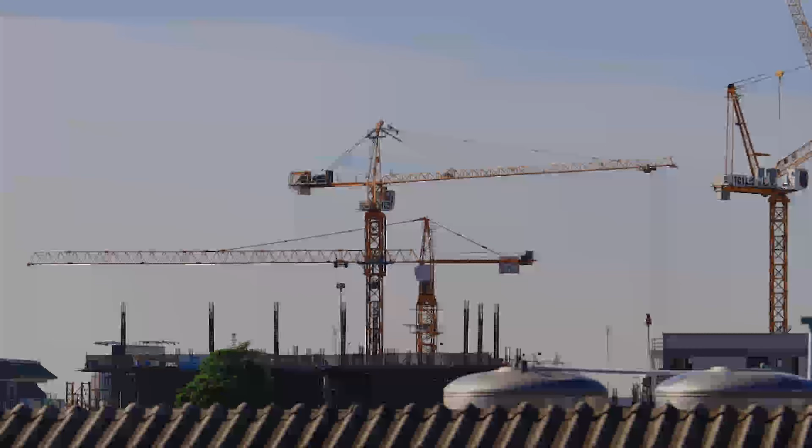I'll start with the incidences, since these are happening a lot. When fire erupts, there can be many reasons, short circuiting or whatever, but another reason is the way urban infrastructure is coming up these days. We have so much population to cater to, and cities are developing without any master plan. It's haphazard, congested. Things are just coming up with no attention paid to fire security or anything.

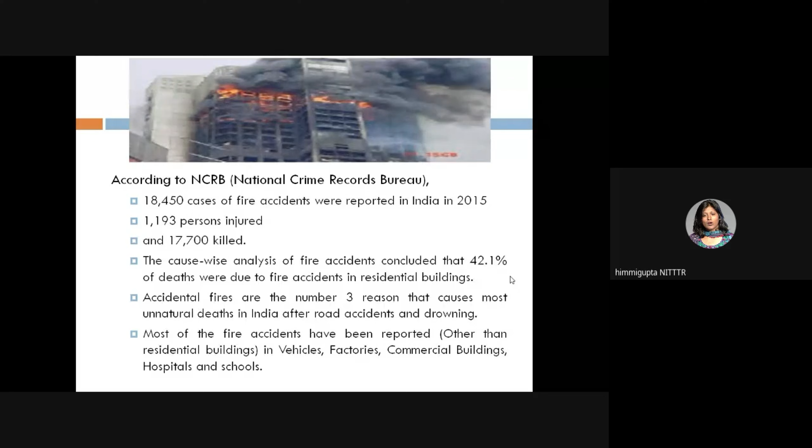Even more alarming, accidental fires are the number three reason that causes most unnatural deaths in India, after road accidents and drowning. Most of the reported cases, other than residential buildings which are 42%, are in vehicles, factories, commercial buildings, hospitals, and schools. So buildings and structures are a big part of where these fire incidences are happening.

It combined almost the area of six Indian states: Delhi NCR, Goa, Sikkim, Tripura, Nagaland, and Mizoram - about 63,000 square kilometers. All this is happening due to climate change, and what has happened to the environment is not going to change very soon. So this danger is upon us around the clock, apart from earthquakes and other disasters. This is another disaster always lurking on our heads, and when a wildfire happens, even infrastructure gets affected.

The occurrences of these fires have become more frequent, more unexpected, and their effects have become more intense, so the risks have become more intense. What risk is happening with fire has to be taken very seriously. This is called fire risk, a proper technical term, and it has been ranked fifth - from last year's ranking in 2017, it has recently gone up by three positions to fifth.

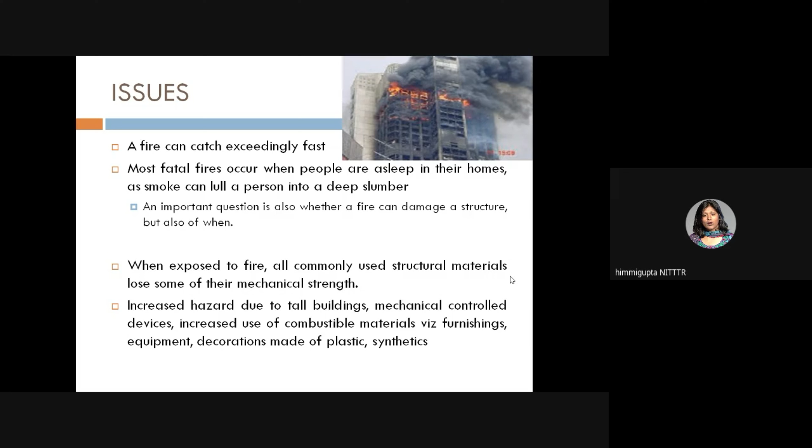There are more mechanically controlled devices around buildings now, and increased use of combustible materials like furnishings, equipment, and decorations made of plastic and synthetics. These are all fuel for the fire, so the hazard has increased with taller buildings and more mechanical devices inside that can catch fire.

So the idea is how we can use engineering principles to achieve the requirements of fire safety of structures. We have to optimize the fire protection to the structures, and also address the complex issue of how the whole structural behavior will happen when a fire comes up.

Fire resistance of a building structure is basically the ability of the structure, when exposed to fire, to maintain its strength for an appropriate time while everything around it burns. That is the basic definition of fire resistance.

It is also the property that prevents or retards the passage of excessive heat, gases, or flames under conditions of use. So this is another way of looking at fire resistance: what will prevent or retard the passage of the fire.

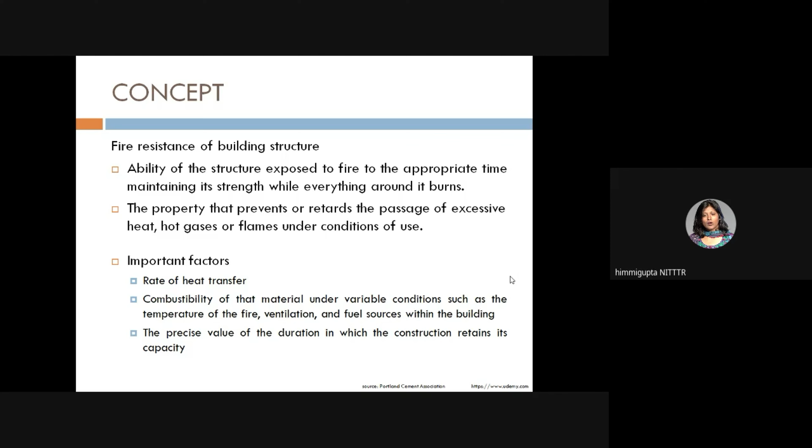Fire resistance means materials and design features incorporated in the building that will get ember exposure, fire exposure, but will resist it. We're not saying the structure will not face the fire—these embers are particles generated due to fire, so the structure will get exposed to it but will resist it. We try to use such materials, or have such design features, and that's what we're going to discuss.

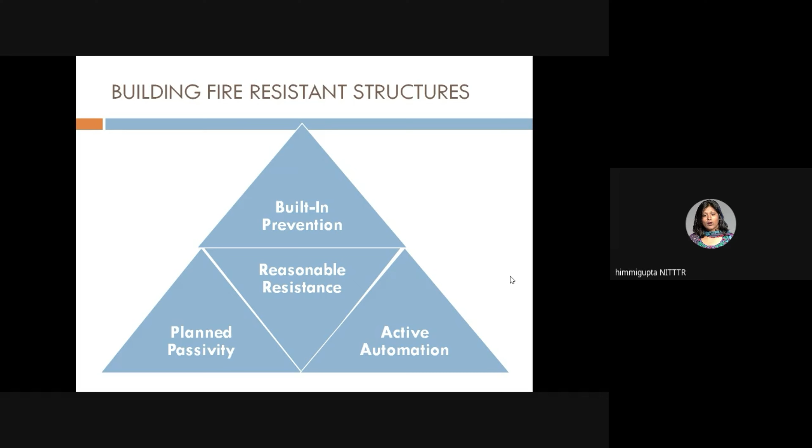To build a fire resistant structure, I need some built-in prevention that will help, some active automation like sprays, and a planned passivity for how to tackle it in a passive way. All three parameters together can give reasonable resistance.

Structurally, one aspect is resistance to collapse, which is the load bearing capacity applying to load bearing elements. Then there's integrity, which is resistance to fire penetration. And the third aspect is insulation, the resistance to transfer of excessive heat. These are the three measures by which fire resistance can be designed: resistance to collapse, integrity, and insulation—all for a specific period during which the structure should be able to resist it.

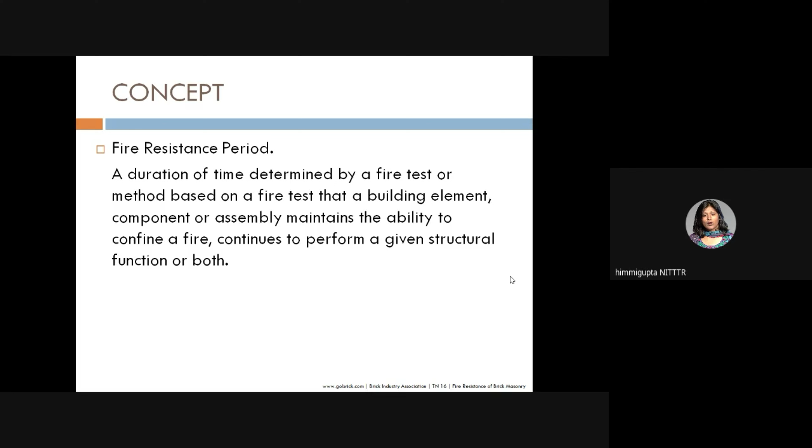This duration of time is determined by a fire test, and a method based on that, a building element, component, or assembly maintains the ability to confine a fire and continues to perform a given structural function, or both tasks. So that is defined as the period. There is a proper test conducted by which we know the thing was able to confine the fire and still perform structurally well.

When doing a fire analysis, the calculation will account for the actual technical state of construction, the material exposed to the thermal impact of fire load. What is the type of construction that happened? What is its state? Then you will be provided with a critical temperature, the temperature to which the structure maintains its capacity, or advised of the optimal fire protection of the structural elements. So the idea is to take into account the construction material, the stage, and then suggest the period and time within which the structure will maintain its integrity, insulation, and capacity.

Building regulations require that certain elements of a structure have fire resistance. So it is required that some elements be fire resistant. Now how are these determined? That will depend on the building size, the building use it is being put to, and the function of the element.

For the design of structures when designing for fire resistance, I have three steps. First, I determine what is the design fire, the fire it may be exposed to - just like when designing for dead load, there are some design dead loads. This design fire is in terms of a temperature-time relationship - with time, how much the temperature will rise. Then I calculate the structural temperatures, what temperature the material will reach. And then I assess the load carrying capacity at this elevated temperature. That is very important.

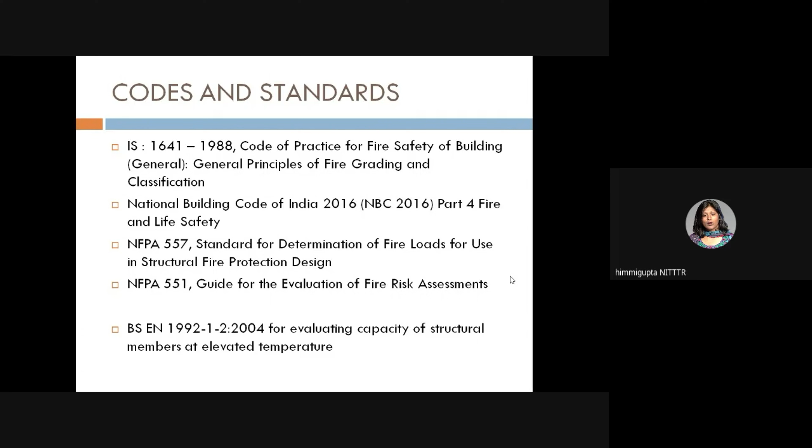Talking of codes and standards, in India the first most important standard in this relation would be IS 1641, which is for fire safety of buildings, general principles. Then our NBC Part 4 also takes due consideration of this. Then we have NFPA 557, for determination of fire loads, and 551 for evaluation of fire risk assessments. Then even British codes are there for evaluating capacity of structural members at elevated temperatures, and many times these British standards, BS codes, are quite similar to our IS standards, so they are also often referred to.

Then we have IS 2190, for fire extinguishers, and also 15683. It's very important to know which codes are applicable.

Now talking of the fire load - fire load is basically the amount of heat in kilocalories which is liberated per square meter of floor area of any compartment by the combustion of the contents of that building and any combustible part of the building itself. Because what is inside the building will burn, and the combustible part of the building itself will also burn. So all this together, how much heat in kilocalories is liberated per square meter of floor area, that is defined as the fire load density.

It is calculated by a formula depending on the floor area, total mass of combustible material in kilograms, and the calorific value of that. Of course, when using this formula, we assume the materials are uniformly distributed throughout the building, and that all the combustible material will undergo combustion. So that's the assumption we are making.

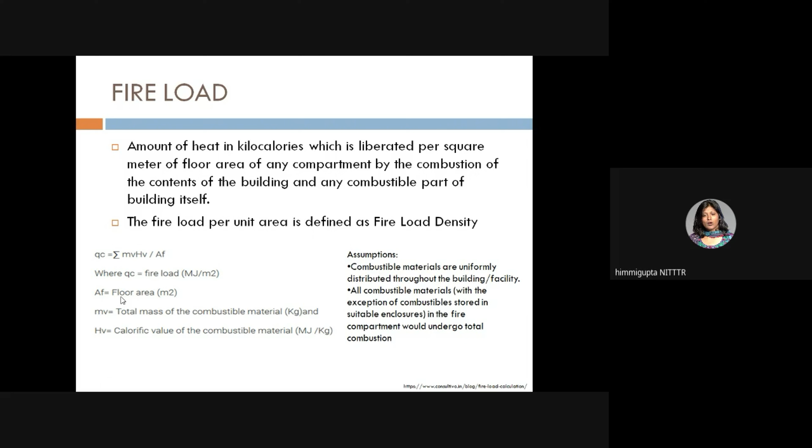Now, in terms of fire load, we also talk of movable contents - the combustible furniture, equipment, goods, supplies - all these which are movable.

Then there are interior finishes like exposed combustible materials permanently fixed to walls, ceilings, floors, plus doors, trim, built-in fixtures. These are interior finish. So these two things are basically contributing towards the fire.

And the fire load sometimes is also called the fuel load. Basically what we do is all weights are converted to equivalent weights of combustible having a calorific value of 4700 kilocalorie per kg. This value is adopted as a general assumption, a safe number, so that whatever weight is there, you assume everything together has this value if you don't have individual data. As an average, this number is adopted very popularly.

The fire load is important because we use this value as a basis to have an occupancy grading. Based on fire safety, grading is given to various buildings, so how much occupancy it can take depends on this.

Now we have to understand that if compartments are larger, they will generate higher temperatures. There will be more radiation from it, and they will have higher burning rates. So this becomes very important to understand. And of course the different thermal conductivities of enclosing walls become important.

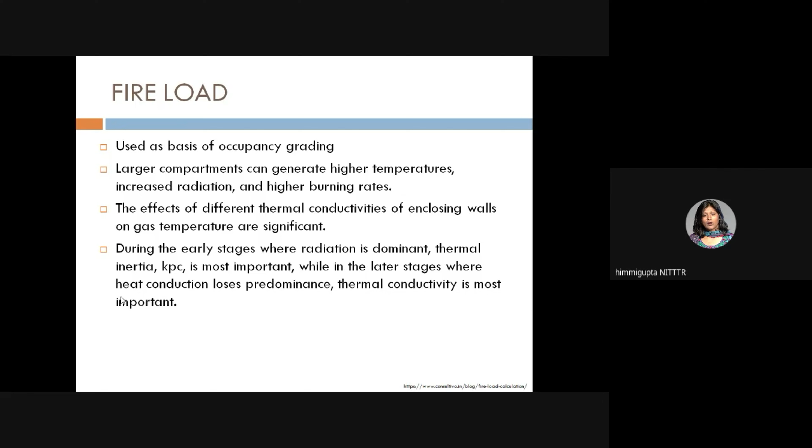Another factor to consider is the early or pre-flashover stages of fire growth, especially for high complex and hazardous entities. When talking of early fire growth, important parameters include the amount and surface area of combustible materials, how they are arranged, how the openings in walls, ceilings, or doors are placed, and what are the local zones of hot gases. These are very important to evaluate whether there will be early fire growth.

Another effect that comes in is the wind effect on high rise buildings. It incorporates into the design fire as an important criteria, because when wind is blowing in high rise buildings, it will definitely add to the smoke, which will also spread radially from the central axis of the plume.

Wherever this fire is generating from the central axis, the smoke will spread radially to higher positions. Then cool air will be entering towards the burning fuel at the lower levels of the building. This is how the fire will keep spreading, and it's necessary to understand this.

As per a study done a few years back at IIT Gandhinagar, the fire load in modern day buildings in India is three times greater than what it was even as late as the 1990s. The number of buildings have increased.

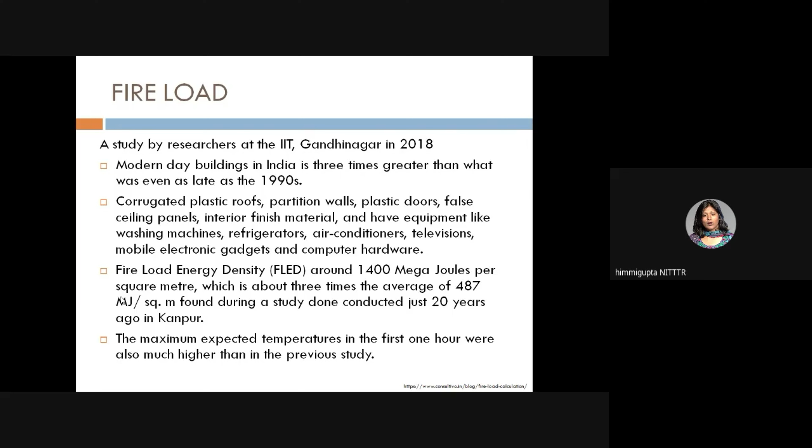It has also been found that the maximum expected temperatures have increased in the last 20 years. Things are only getting more and more risky - more buildings, more fire load, and even the expected temperature has increased.

NFPA standard 557 proposes that the fire load calculation should be done by either the weighing method or the inventory technique, or a combination of both methods.

In the weighing method, it is based on the weights of the combustible and the corresponding calorific value of the material. You convert them into units and get the megajoule unit - weight into calorific value.

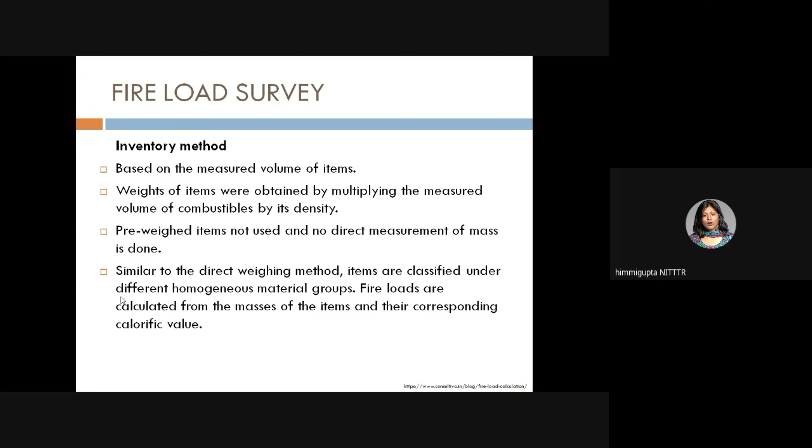Inventory method is based on the measured volume of items, so weight is obtained by volume into density. Pre-weighed items are not used and no direct measurement of mass is done. Similar to direct weighing, you then use the calorific value to get the corresponding heat values.

The combination method uses data from both the direct weighing method and inventory method - weights obtained by directly weighing or pre-weighed items, or by taking dimensions and volume and converting with density to volume, then finally applying the calorific value to get the heat generated.

As a designer, the inputs we need are: the layout, major compartments and unit blocks within the facility, the inventory of material, what kind of material contributes to fire load, any situational or seasonal impacts on the inventory, and site observations if any.

When doing the design of a member, this is how we go about it. We determine the reduced cross section corresponding to 500 degrees Celsius, obtain the material property at that temperature, calculate the rebar temperature using penetration due to fire, and then determine the reduced moment capacity.

Many studies have been done showing how, in case of fire, the various resistance capacities change. For example, if otherwise what was required was 342, for fire resistance you require at least 381.

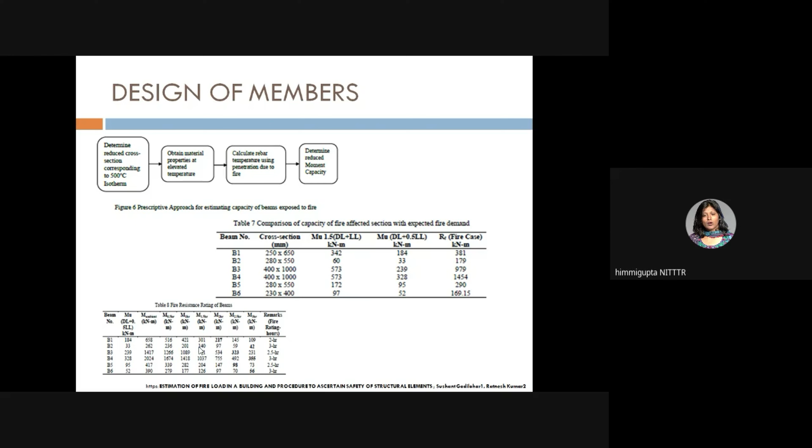When designing a structure exposed to fire, I do a structural design at normal temperatures and then in fire conditions. I should know the material properties in fire, then design the individual members exposed to fire, and then the entire structural assembly as well.

Talking of fire hazard, the classification is into three categories: light, ordinary, and extra, or low, moderate, or high. There may be class A combustibles in minor quantity and class B flammable liquids less than 4 liters in quantity. These include solid combustibles like paper, wood, cloth, and plastics, and flammable liquids like alcohol, ether, oil, gasoline, and grease, which can be extinguished by smothering.

So these are the two classes of things, and based on the quantity in which they are present, the classification is done for the hazard.

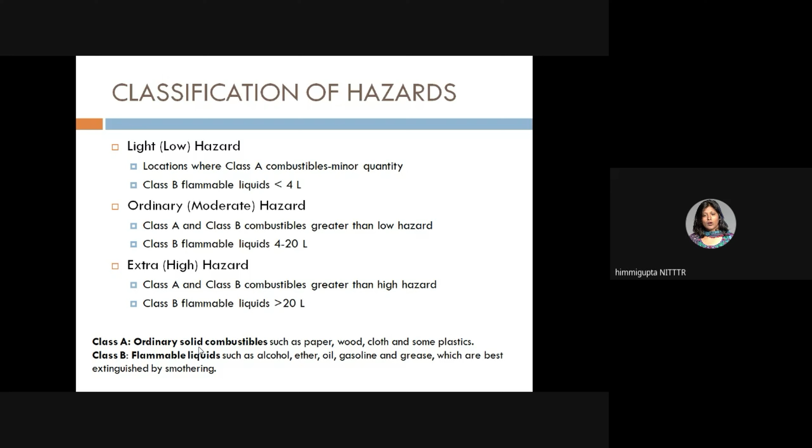Buildings are also classified depending on the character of occupancy, whether residential, educational, institutional, assembly, or business. These groups are defined, and there is also a hazardous group, J.

Another important aspect is IS 1641, which divides the nation into zones. The concept is that the city or area should be demarcated into distinct zones based on the fire hazard inherent in the building according to occupancy, which are called fire zones.

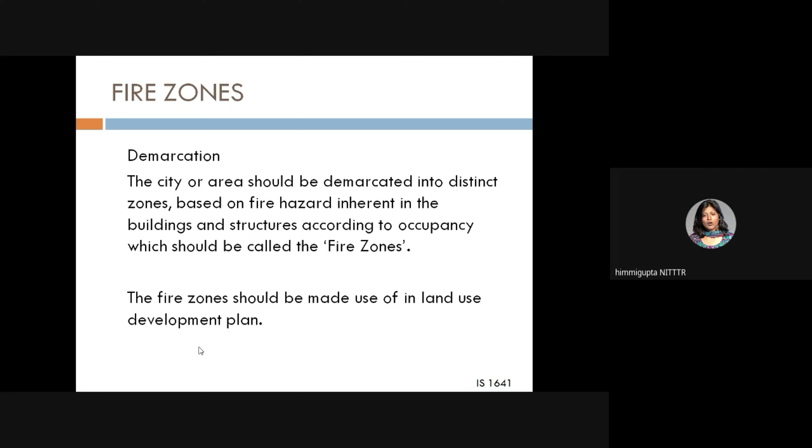When doing land use development planning of a city, I must take this fire zone into consideration. If an area is at a higher fire hazard zone, I have to plan buildings accordingly. Mostly zone one should have residential, educational, institutional, and mercantile buildings under development for such occupancies. Zone two can go for business and industrials, and zone three for high hazard and industrial use. So the requirements are met accordingly.

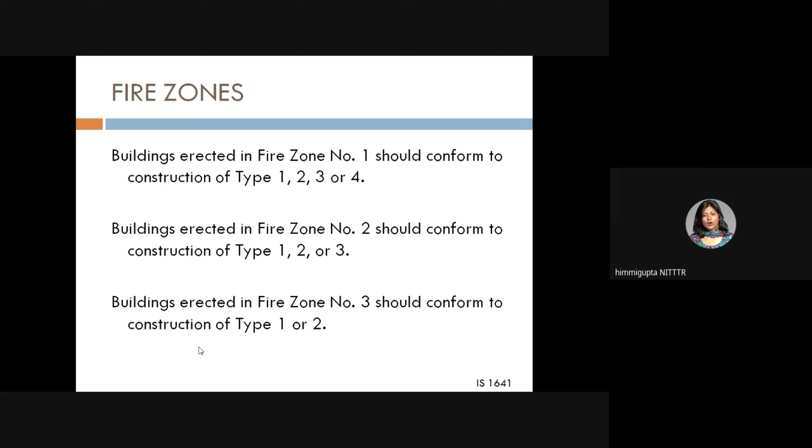Once the fire zone is determined and where that building can go, the type of construction is defined by the code, and you can go for these types of construction. They have defined construction types 1, 2, 3, and 4.

The NBC talks of construction classes. There are four classes according to NBC, based on the resistance offered by building components for 4 hours, 3 hours, 2 hours, or 1 hour. Accordingly they give type 1, 2, 3, and 4.

Keep in mind the structural components should be constructed so that materials can withstand fire as an integral member for the desired time period. In this time there should be enough time for the occupants to come out, and the building should not collapse during this time that we are specifying, 1, 2, 3, or 4 hours.

Once we've done the fire load calculation, next we do the fire risk assessment. The idea is that it is an approach wherein we try to detect, prevent, and mitigate any hazard or condition that will lead to fire at a particular building due to activities carried out in the premises. So the idea is to investigate the likelihood that fire could start and cause harm to those in and around the premises based on the existing fire load.

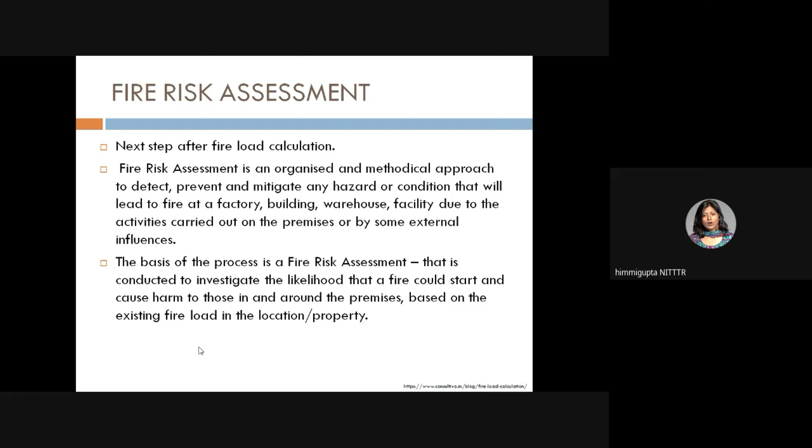Now coming to how to give fire protection. We have a design for the particular type of construction that is given there, according to the code we have the fire load calculation, go for the construction fire zone and everything. Then coming to, apart from design factors, how we can give fire protection also.

The idea is that we have to save life and property, minimize the interruption of services due to fire, and mitigate the unwanted effects of potentially destructive fires. We have to understand that no practical building material is truly fireproof, but well-constructed houses and buildings can prevent such tragedies by using materials that are relatively fire resistant. So everything cannot be fully fireproof, but the way we plan and construct our buildings, we can at least have a relatively fire resistant building.

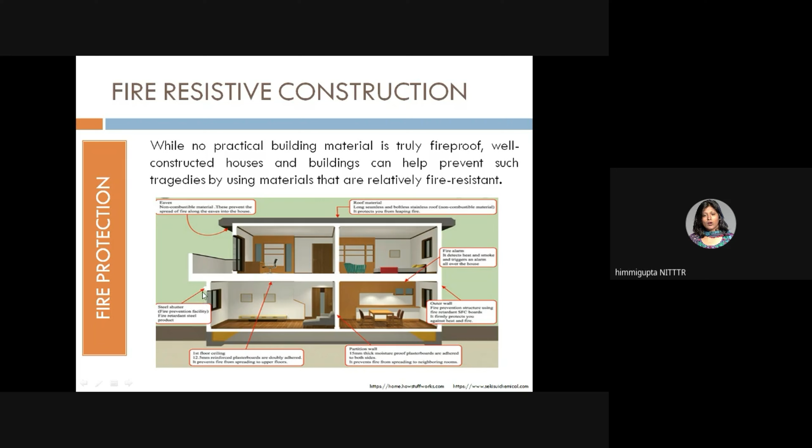Giving an example of how we can go about this: if we are talking of eaves, they can be of non-combustible material, so that along the eaves the fire doesn't spread into the house. Then roof material, if we have non-combustible material, that is good, so fire will not leap. Then we can have fire alarms, outer walls which are prevented, then partition walls. We can have shutters, in case they are there, that are fire retardant. Then ceilings, they can be looked into.

Now, talking of fire-resistant construction of walls and columns: one strategy is to make thicker sections so that they can resist fire for longer time and also act as a barrier so that fire doesn't spread to adjoining areas. If walls are to be made of stones, granite, and limestone, they should be avoided.

In case of frame structure, RCC should be preferred to steel, and if steel is to be used for frame structures, the steel structure should be properly enclosed or embedded in concrete, terracotta, brick, gypsum, plasterboard, or any suitable material. Walls of lightweight concrete are preferred to dense concrete as far as fire resistant qualities are concerned.

If the framework is of RCC, then thicker cover should be given so that members can resist fire for longer. Generally 40 to 50 cover for columns, and beams going up to 35 to 40, and for slabs about 25.

Partition walls should be of fire resistant material like RCC, bricks, hollow concrete, clay tiles, asbestos, cement boards. 20 centimeter thickness of common wall is sufficient from a fire resistant point of view, but it should be raised above the roof level by at least 90 centimeters. Clay wall has better fire resistance.

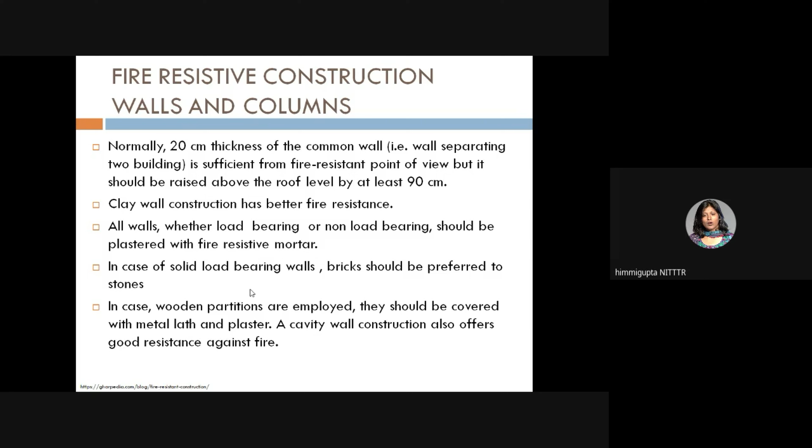We can have a fire resistant mortar on the walls. In case of solid load bearing walls, bricks should be preferred to stones. Wooden partitions, in case they're employed, should be covered with metal lath and plaster. Even a cavity wall is a good resistant to fire.

This is the wall thickness given by various codes for different fire hours required. So the first one was for bricks of clay, concrete, or sand lime, then concrete blocks, then RC. Then for hollow block construction also, minimum thicknesses are given for each type of block. All these details are very exclusively given in the code, so they must be properly interpreted and used in the design.

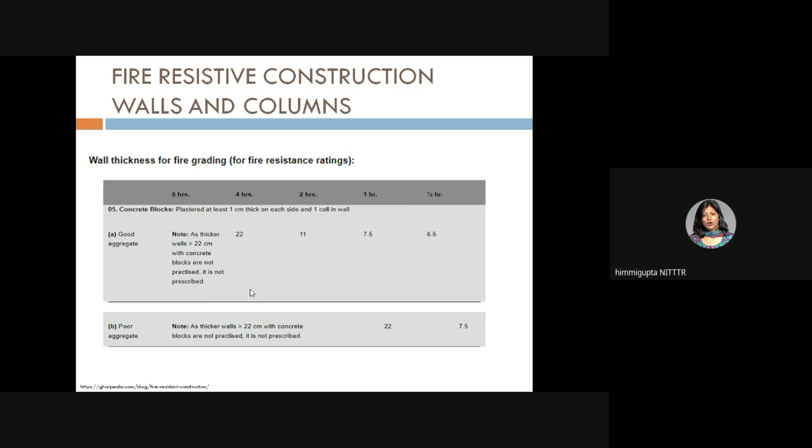Now, after columns and beams, coming to floors and roofs, they are also important since they are the horizontal barriers which will prevent the spread of heat. If the slab roof is sloping or pitched, that is always better, so trusses should be either of RCC or protected rigid steel with fireproof covering. If you have thin timber for the floor, thicker joists at a greater spacing should be used.

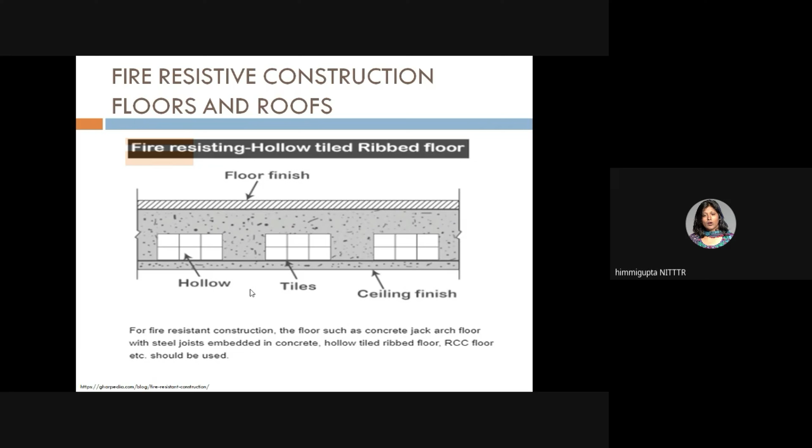Fire stops or barriers should also be provided. Materials for flooring like ceramic tiles and bricks are more suitable for fire resistance, so covering the iron parts with cork, carpet, rubber tiles gives insulating material coverings. Ceiling directly suspended from floor should be fire resistant materials like asbestos, directly attached or suspended from the floor joist, so try to have them fire resistant. This is one drawing of a fire resisting hollow tiled ribbed floor, which can be given for various finishes.

Coming to wall openings, what we want is that from the wall openings, the fire spread should be as least as possible. Now openings are a means to escape, so they should be properly protected by suitable arrangements in case of fire, otherwise they will become a passage for fire instead of escape for people. If we are providing solid timber doors, minimum thickness should be 4 centimeters. Wire glass panels are preferred for windows. Rolling shutter doors should be used for garages and shops, and timber door frames should be 8 to 10 centimeters.

Windows, if carried down to the floor, should have a suitable barrier. Openings used for communication should have double fireproof doors. Any window should have fireproof shutters. Then any structure with a separation less than 6 meters from an adjoining structure should be made fireproof.

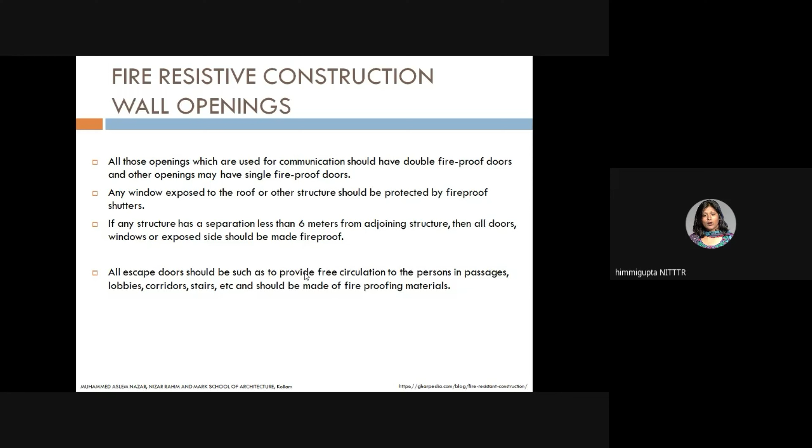Free circulation to persons in passages and lobbies should be given at all escape doors. Escape elements such as staircases, corridors, lobbies, and entrances should be constructed of fire resistant material, separated from the building, and fireproof. Doors to these escapes should also be fireproof.

Staircases should be located next to the outer wall, accessible from any floor in the direction of flow towards the exit, and fixed so that they can be closed from inside only, so that they will help people to leave and evacuate the building safely.

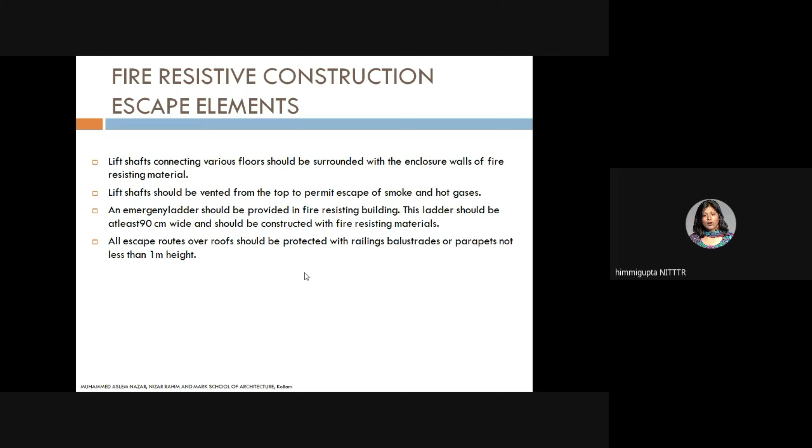All these things are very important when planning buildings. Then lift shafts and enclosure walls should have fire resisting material, and they should be vented from the top to permit escape of smoke and hot gases. An emergency ladder should be there. Then all routes with railing balustrades should not be less than 1 meter height.

Then internal stairs have various requirements also, for how they should be placed and insulated. Wherever possible, go for a straight flight. Minimum clear width should not be less than 1 meter so that people don't panic and have enough space to go out. For fire escapes, minimum number of risers, height, slope, everything is given, even for spiral stairs.

In case we have steep ladders used in the building, that can be used for a low density of population. Where fire escape stairs or spiral stairs are not practical, we can go for steep ladders, and their dimensions are also specified.

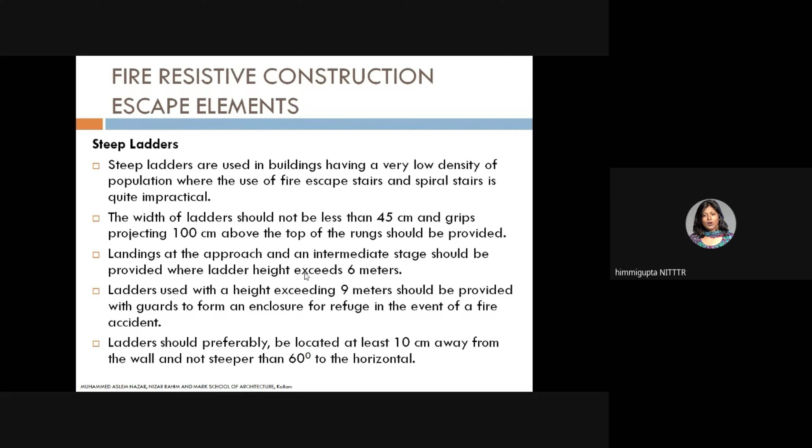So basically when planning for fire protection, I need to have three important aspects in mind. First is detection - we should be able to detect that fire has happened. Then there should be signaling, that the signal should go that yes, fire has happened, something needs to be done, and then we should be able to suppress the fire. That is also very important. So presence of fire should be known, detectable manually or automatically. Then building management, occupants, and the fire department should get notified of the presence, and equipment systems should be there to extinguish the fire and remove the smoke.

There are two types: addressable and conventional. Addressable specifically monitors the location of each device, so in case of a fire or other emergency you know exactly where the problem is. That saves precious time and helps emergency services prevent loss because they know specifically where the fire has happened. Conventional systems only alarm for a problem in a general area, so they are suited for small sites.

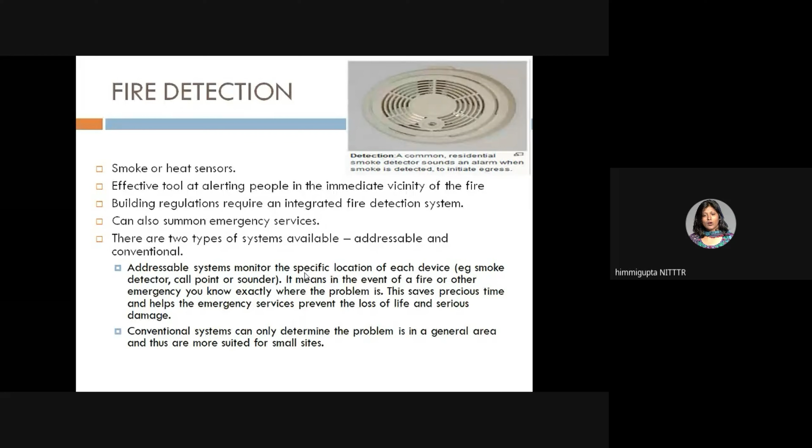For fire prevention, we can also go for hypoxic air fire prevention, or oxygen reduction systems, which can be done as an automatic system. They permanently reduce the oxygen concentration inside the protected volume so that ignition or fire spreading cannot occur. At lower altitudes, hypoxic air is also safer to breathe for healthy individuals.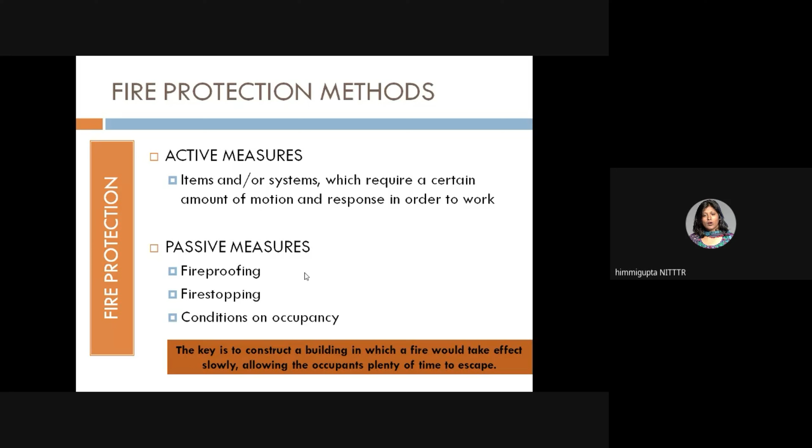Active measures are items or systems which require a certain amount of motion and response in order to work, but passive measures are always working - fireproofing, fire stopping, or conditions on occupancy put in place so that fire can be prevented. The idea is to construct a building in which fire would take place slowly, allowing occupants plenty of time to escape.

For fire suppression measures, we can have fire blankets, made of Kevlar or fire fiberglass - laboratories and factories generally have them. Then fire extinguishers, the common one being the ABC type, which can be used for normal fires, liquid fires, and electric fires. Special types exist according to the fire type.

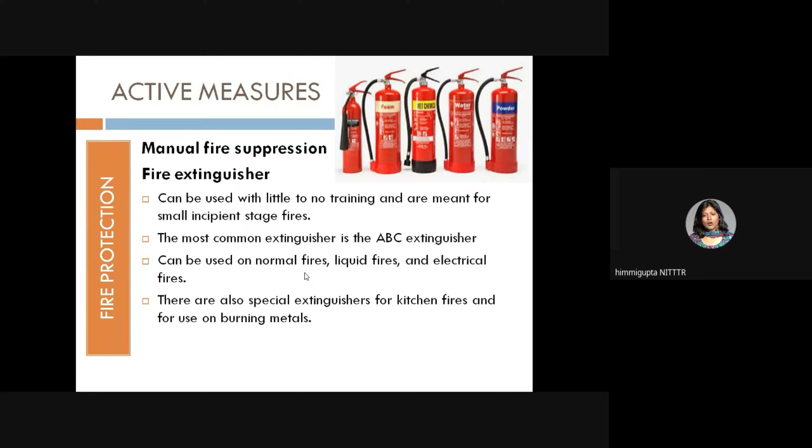Then manual fire suppression standpipes, which we have seen in most high-rise, multi-story buildings. They can be dry or wet. Most of them are dry systems and cannot be used by the public, so a fire engine is required to pump water into the system. Most dry systems don't have pre-connected hoses and require firefighters to bring in the hose. Wet systems always have water in the pipes and can be used by anyone.

Then automatic fire suppression - no human intervention is required. If a fire occurs, these suppression measures automatically come into play and suppress the fire. One example is sprinkler systems, definitely provided in very critical places, which sprinkle water.

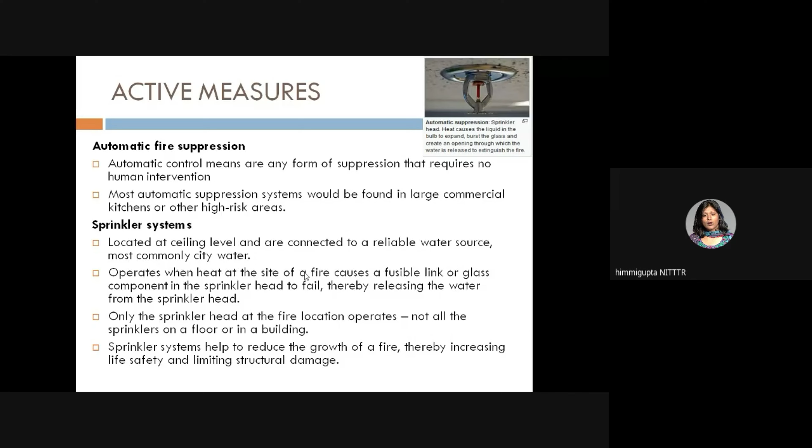Another is gaseous clean agent systems. Where water or dry chemical extinguishing agents would do more harm than good - say server or computer rooms - we go for gaseous systems. The system works by flooding an area with an inert gas or mix of inert gases to break the fire tetrahedron. We actually fill the place with gas. Due to inert gases displacing oxygen, there is a suffocation risk, so we definitely don't want people inside when this measure is taken.

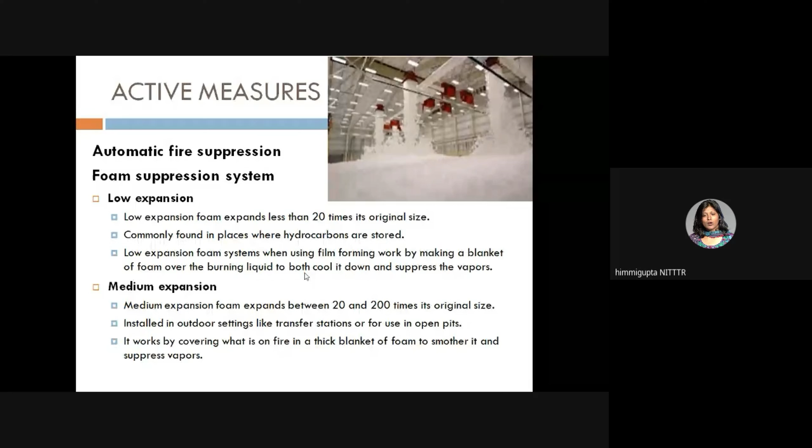Then there are also foam suppression systems - low expansion, medium expansion. The foam expands, and that's how the fire is extinguished. High expansion foams are also there; they can go to 200 to 1000 times their original size, so they quickly fill up the space and cut off the oxygen supply.

Then talking of fireproofing - that is rendering something resistant to fire or incombustible, material used for making anything fireproof, whether structures or materials, trying to make them resistant to fire or incombustible. So where do I need it? Structural steel has to be kept below the critical temperature of 540 degrees Celsius, and electrical circuits have to be kept below the critical temperature of 140.

Then LPG containers, so that I don't want a boiling liquid expanding vapor explosion, fire protection is very important. Then pipe bridges, vessel skirts in oil refineries or chemical plants, they have to be kept below this 540, and concrete linings of traffic tunnels. So all these require fire protection.

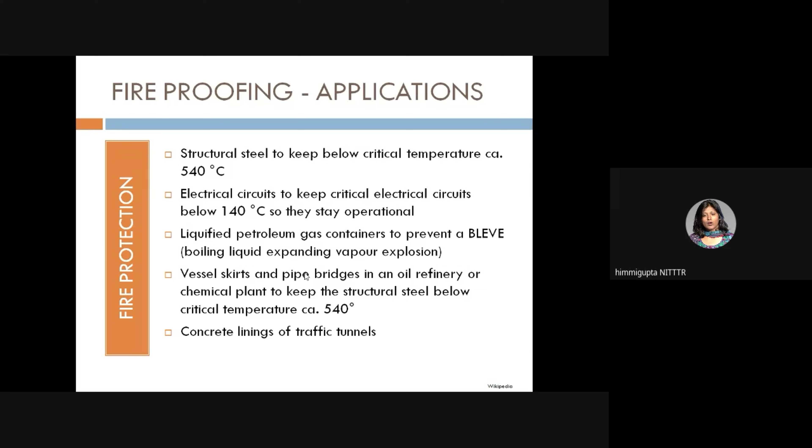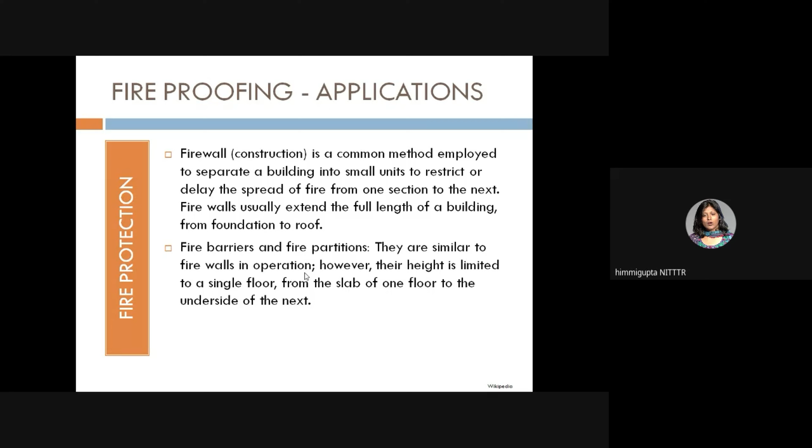So firewall, this is a common method, when we separate the building into smaller units to restrict or delay the spread of fire from one section to the next. Then fire barriers and fire partitions are similar to firewalls. Their height is limited to a single floor.

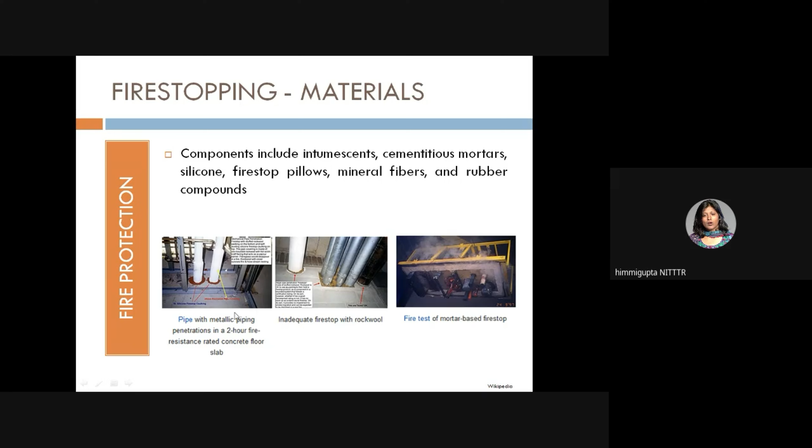Then many components of fire protection - many times we are using intumescents, cementitious mortars, silicone, fire stop pillows, mineral fibers, rubber compounds. So all these things are shown in the picture here also, how we are using rock wool and everything. Fire tests are done on them.

So in case I have to make a new electrical installation of cables and everything, then a fire rated barrier has to be done as a fire stop. So I need to put a fire stop at all these places.

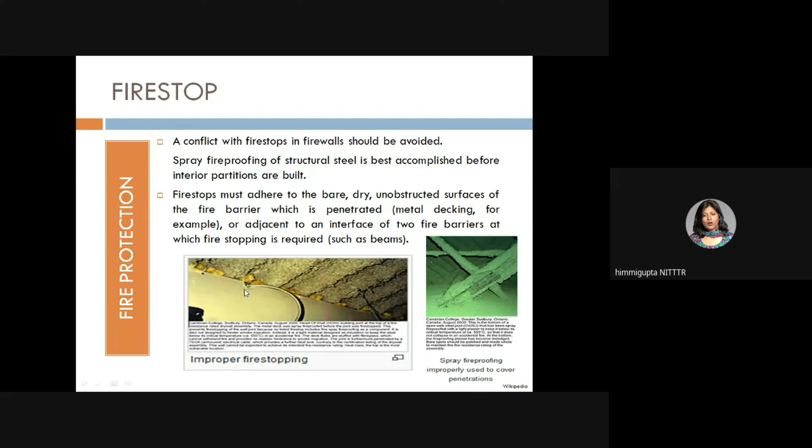Another thing - a conflict with fire stops in firewalls should be avoided. Spray fireproofing of structural steel is best accomplished before interior partitions are built, so that there is continuity. What we see here on the right side, because spray fireproofing was not done properly, there was penetration into the cover. This is also an example of improper fire stopping, if you can see here. So we have to take care of the quality aspects also.

Then also, when we talk of fire tags, fire stops, tagging is very important. Proper maintenance by installation of tags on each side of the fire stop is needed to refer to documents indicating approved procedures for original installation and re-entries. Certification is being done from time to time that it has been inspected, that it is working. So these tags help.

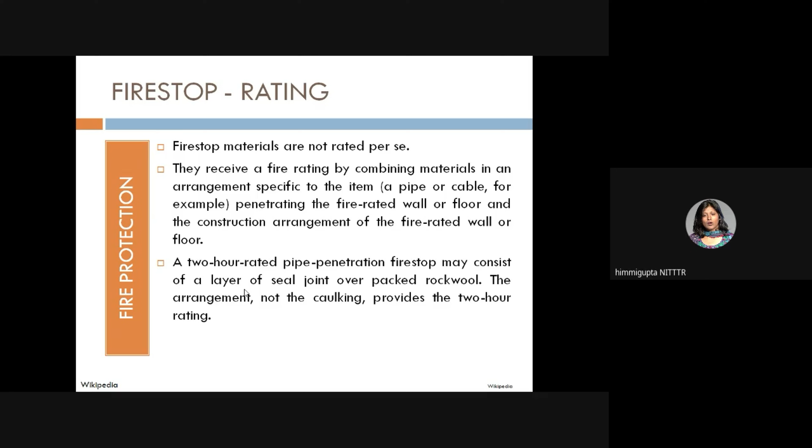Fire stop materials are not rated per se, but they receive a fire rating by combining materials in an arrangement specific to the item - a pipe or cable, for example, penetrating the fire rated wall or floor. So a 2 hour rated pipe penetration fire stop may consist of a layer of seal joint over packed rock wool, which can provide a 2 hour rating. So these kinds of things, people try to combine and have innovation and have maximum results.

Now talking of various materials - even materials themselves are rated in respect of how long it will take fire to affect their structural abilities. For fire resistant structures, of course, this time will be longer. Even heavy timber can be considered fire resistant - it is combustible. However, metals like aluminium and steel aren't combustible, instead they tend to buckle under intense heat. So everything has its own parameters which must be looked into carefully.

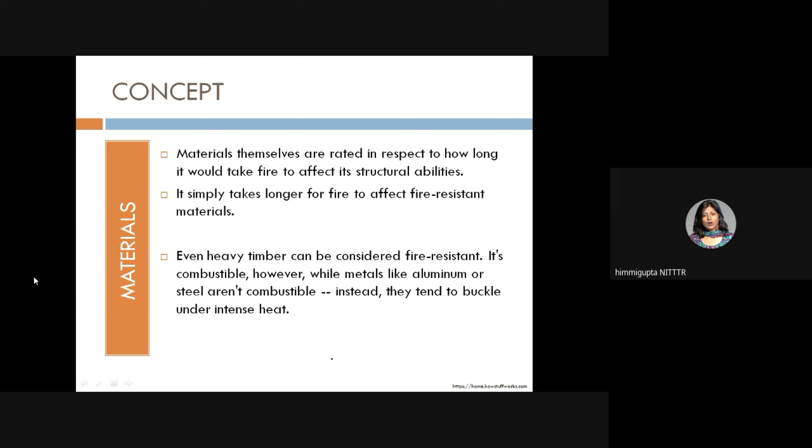So fire resistant qualities of a material are very important - they determine how well the structural integrity will be maintained when exposed to intense heat and flames. Asbestos is one material historically which has been used very popularly for fireproofing.

Fire retardants can be used on their own or together with binders such as cement in sprayed form and press sheets, as additives to a variety of products and materials like building materials and fabrics for protective clothing. But later on, it was seen that it is causing cancer in the long run.

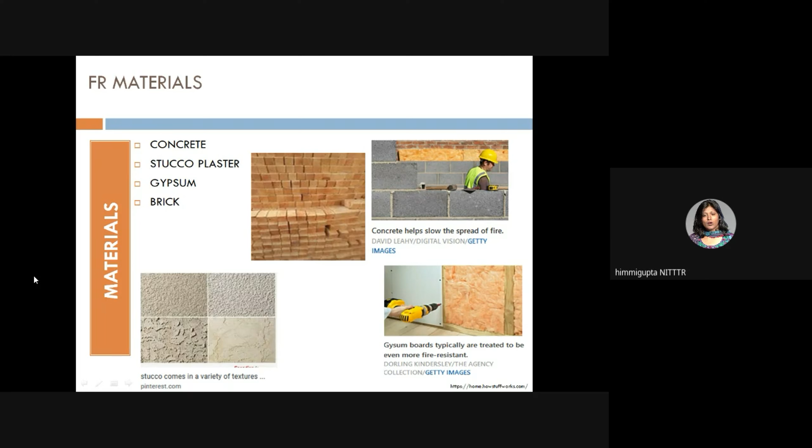There are various endothermic materials like gypsum, concrete, and other cementitious products. Fire-resistant materials like concrete, stucco plasters, gypsum, and brick are all known to have good performance. Stucco is a plaster that has been used for a long time and has good aesthetic value also. Modern stucco is made of Portland cement, sand, and lime, and is an excellent and durable fire-resistant finish material. For brick and wood, we can cover with two or three coats, which can give at least 1 hour of fire rating to a wall.

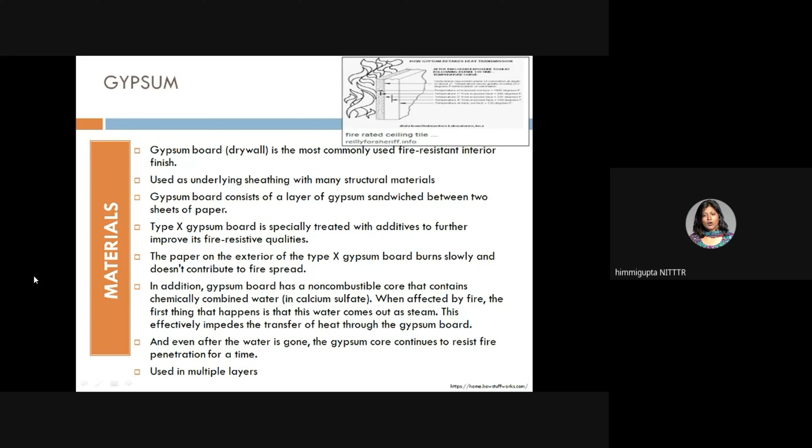Gypsum board, which is drywall, is very popular in Western countries with their type of climate, and is used very extensively and successfully in multiple layers. Since bricks are made in a fire kiln, inherently they are highly resistant to fire. Individual bricks are much more fire resistant than a brick wall, because in a wall we have mortar coming in between, which is less effective. So depending on the construction and thickness of the wall, a wall can achieve 1 to 4 hour fire resistance.

Now, windows - even before direct contact with flames, the intense heat of a nearby fire can cause the glass to break. A broken window will allow flames to enter a building easily, and heat from a fire outside might be enough to simply ignite flammable items inside the home without direct contact. So windows are a very important part, we have to really take care of them.

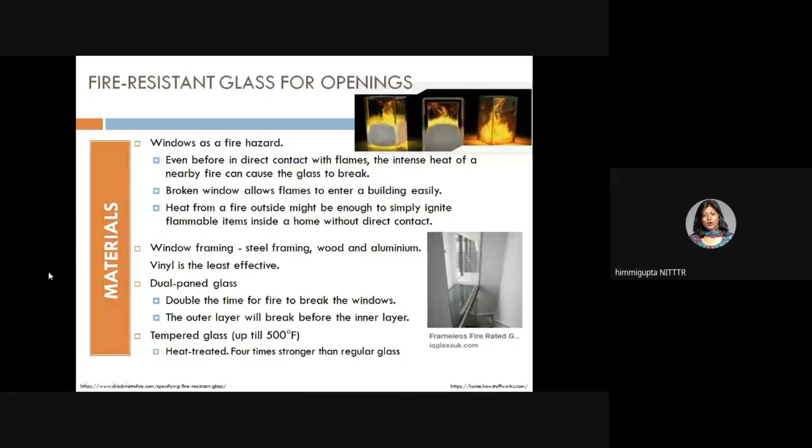For window framing, go for steel, wood, or aluminium. Vinyl is not a good option. Dual-paned glass will double the time for fire to break the windows - the outer layer will break before the inner layer. Then tempered glass, which can withstand up to 500 degrees Fahrenheit, is heat treated and is almost 4 times stronger.

Then we even go for glass blocks, and there are fire rated glass which can survive up to 1600 degrees Fahrenheit. This includes wired glass, which has tempered glass with metal wire reinforcement, ceramic glass, specially tempered glass, transparent wall units, and fiberglass doors - all these kinds of things are good options.

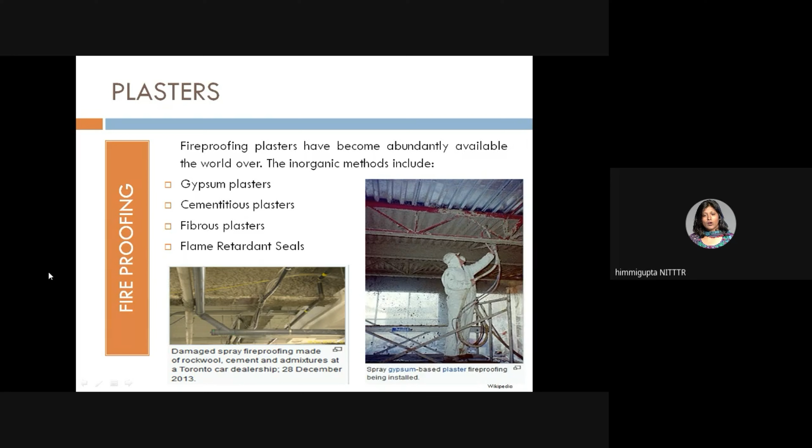There are many plasters available, like gypsum plaster, cementitious, fibrous plasters, and flame retardant plasters that are put up to have better fire resistance. There are also lightweight plasters consisting of gypsum or cementitious materials, fibrous materials. Then there are calcium silicate boards - proprietary boards and sheets made of gypsum, calcium silicate, vermiculite, perlite. These are all very common and popular materials.

There is also a concept of thermal break - the idea is it is manufactured from non-combustible components. Definitely where you need fire rating above 18 stories for buildings, this is good thermal protection. It also acts as a connector from steel to concrete. It is made from Ancon STC20, which is one of the materials available in the market - a steel to concrete thermal break.

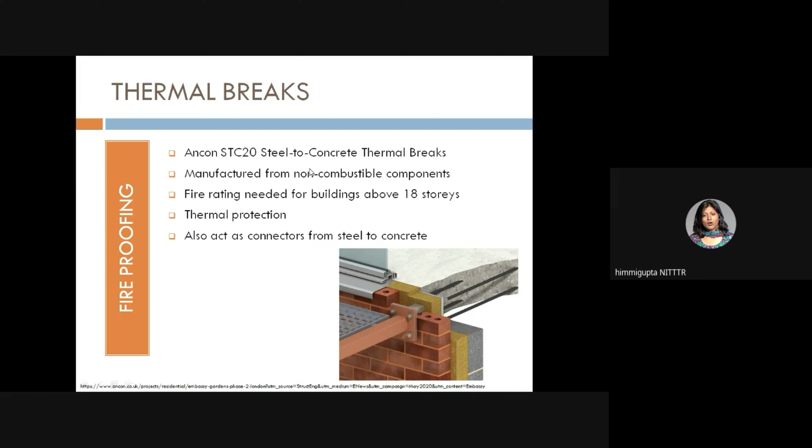Then intumescent paints are available, which are the cheapest fire protection alternative. You put up a thin layer, maintaining the original appearance of the steel structure. They are aesthetic also, and can be applied in the workshop or on site. Thin layer paints can be water based or solvent based, while thick paints are based on epoxy, for hydrocarbon fires, so they can be very effective.

Then fire stopping sprays are available, like cement fiber, vermiculite, plaster. Where aesthetics are not very important, you can go for such kinds of sprays also.

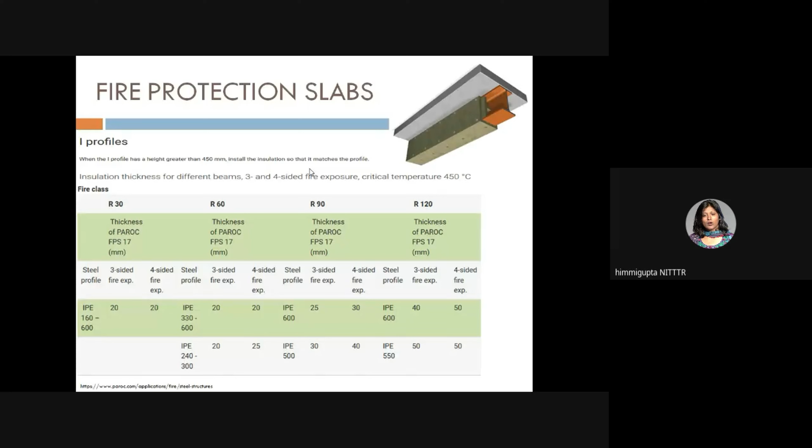Then coming to fire protection slabs - you can put up slabs on these I profiles where they have height greater than 450, so that you put up this fire slab over it to protect it. Then there are RHS profiles also, which are rated for fire as shown here. Many companies are offering these kinds of products also.

Then going for fire resistance rating, that's another parameter. Like yesterday we were talking of load rating of girders, beams, or bridges, similarly there is fire resistance rating also. The idea is it is a measure of the time that an assembly will withstand the passage of flame and smoke and the transmission of heat when exposed to fire under specified fire conditions, including structural load if applicable. Based on ISO 834 fire resistance test for elements of building construction, then there are ASTM standards with identical fire exposures prescribed in both standards. All these are giving the fire resistance rating.

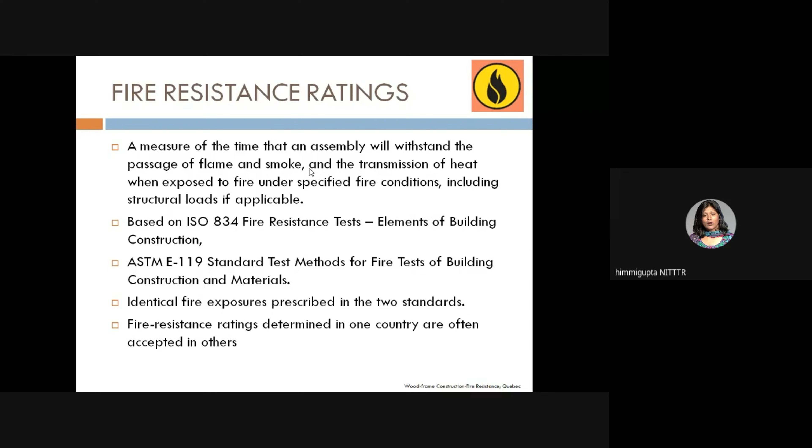The idea is they are using various time increments to correspond to the length of time the material should be expected to perform reliably in a fire. So if a product has a 45-minute rating, theoretically you can count on it containing flames and smoke for the first 45 minutes of a fire, it will be able to contain it very nicely, won't spread before 45 minutes. Once the product has completed the rigorous test process, it is assigned a fire rating, which can range anywhere from 20 minutes to 3 hours. Building codes dictate where the different rated products would be allowed in a building, accounting for how long a time can be given safely to people to exit the building.

When I'm talking of glass, how do they do the testing? They fix it to a wall, following a strict time or temperature curve. The heat in the furnace is raised to an intense level, simulating conditions of the building. To pass the test, the glass must remain in the frame. Cracking is allowed provided the glass can still act as a barrier to flames and smoke.

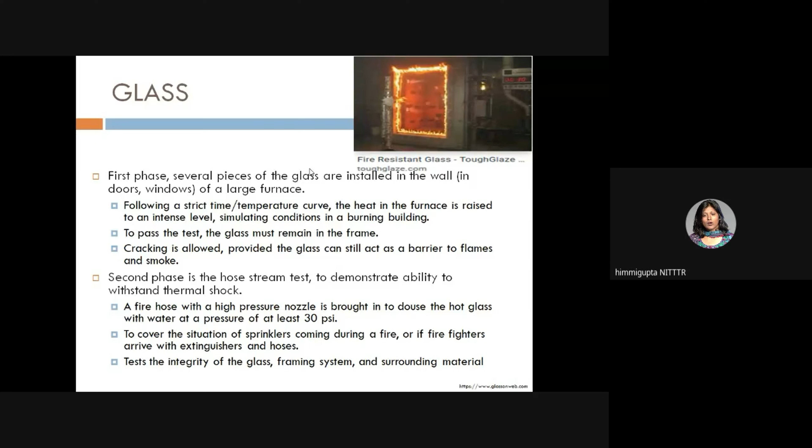Then the second test is the hose stream test, the idea is to demonstrate that the glass can withstand thermal shock. A fire hose with a pressure nozzle, very high pressure, is brought close to the hot glass with water at a pressure of at least 30 pounds per square inch, to cover the situation of sprinklers coming during a fire or if fire extinguishers arrive. This tests whether the glass has integrity with the system and surrounding material.

For masonry, we generally do a fire endurance test. The hose stream test subjects a specimen to impact, erosion, and cooling effects over the entire surface area. A superimposed load is applied to bearings. The specimen's applied load is required to be at maximum load conditions, and columns are located to simulate the maximum load condition, which are recognized by the design criteria.

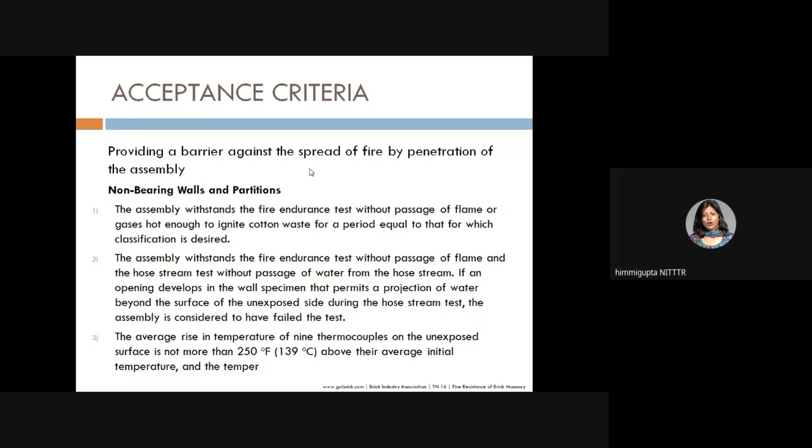So when I have to go for a fire safety design, I should have a fire resistant construction first of all, then vertical openings, adequate lighting, coordination with fire department, vertical transportation should be possible, coordination with mechanical and electrical, compliance with the code for specific use groups, exit enclosures, means of egress, length of travel, and smoke controls. All these have to be kept in mind.

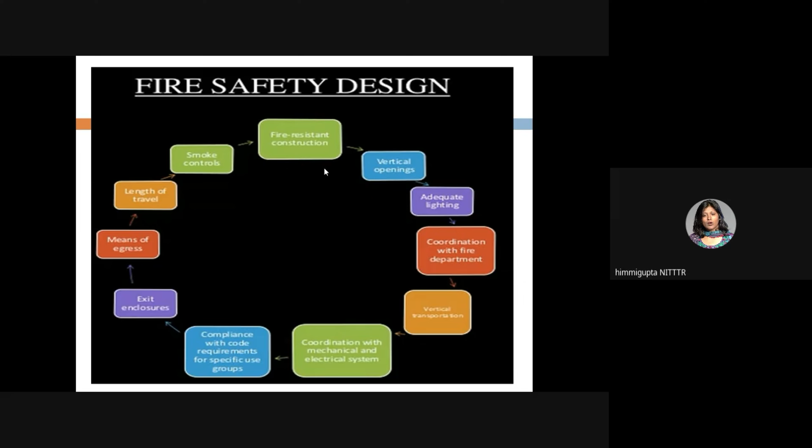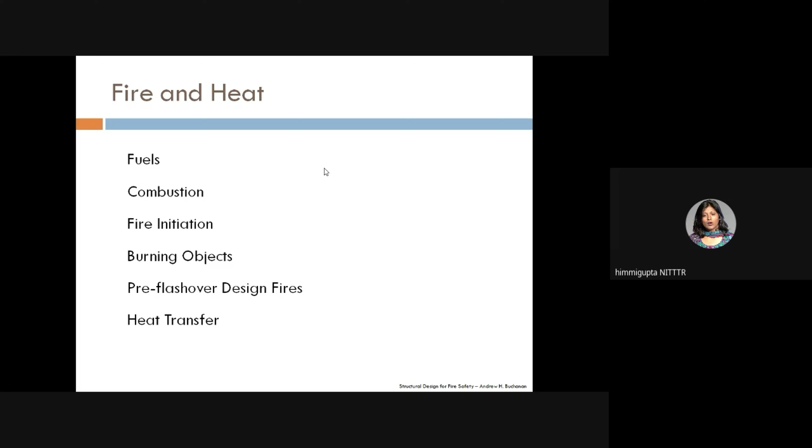When talking of fire and heat, the important terms are fuels, combustion, fire initiation, burning objects, pre-flashover, design fires, and heat transfer. These are very important terms which must be read from the NBC.

For concrete structures, they are strong and most durable when we talk of fire resistance of materials. Basically, cement, which is limestone, clay, and gypsum, and the aggregate, are chemically inert and therefore virtually non-combustible.

The exact fire resistance property will depend on the amount of aggregate used. Natural aggregate tends not to perform as well, but moisture in the aggregates can expand when heated, causing concrete to spall after long exposure. Concrete also has a slow rate of heat transfer, so that's why it's a desirable material.

The World Trade Center, despite the intense heat of burning jet fuel when the planes hit the buildings, had a 4-inch, 10 centimeter concrete slab between each floor of the towers. So they were able to limit the spread of the fire for some time at least. But since the tower walls were framed in steel and other materials, not concrete, when the heat of the fire topped 800 degrees Celsius, the tower's supporting steel structures weakened and that led to collapse. So concrete is definitely a better option.

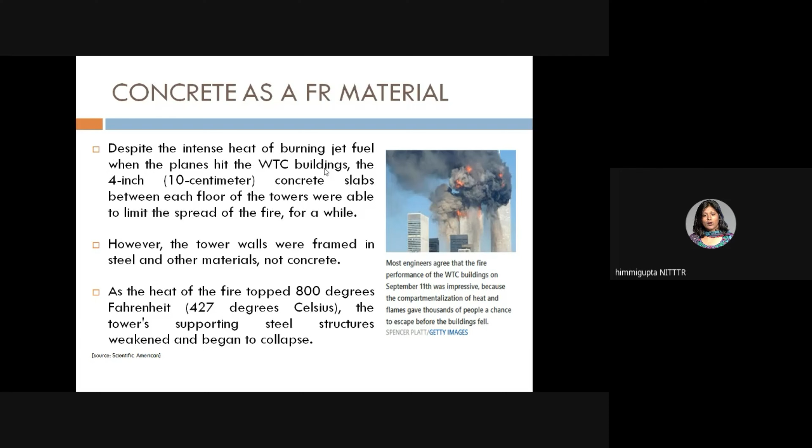Concrete can generally withstand up to 4 hours of extreme fire, while most wooden frames won't last even for an hour. Plus, when concrete burns, it does not emit any toxic fumes, it doesn't produce smoke, and it doesn't drip molten particles. So as a fire resistant structure material, it is also very cost effective, and often rated as the best fire rated roofing material.

Definitely, as I said earlier in the first lecture, inherent construction materials, structural design, and overall design robustness are important. These days we are trying to design for robustness, that is, we don't want progressive collapse. Concrete can help with this.

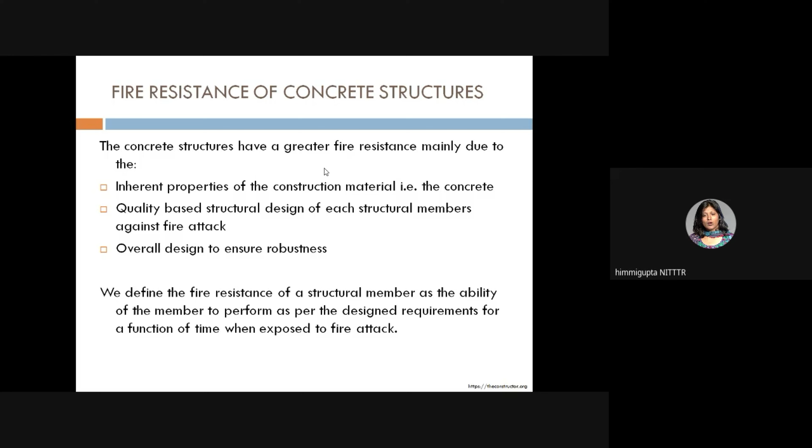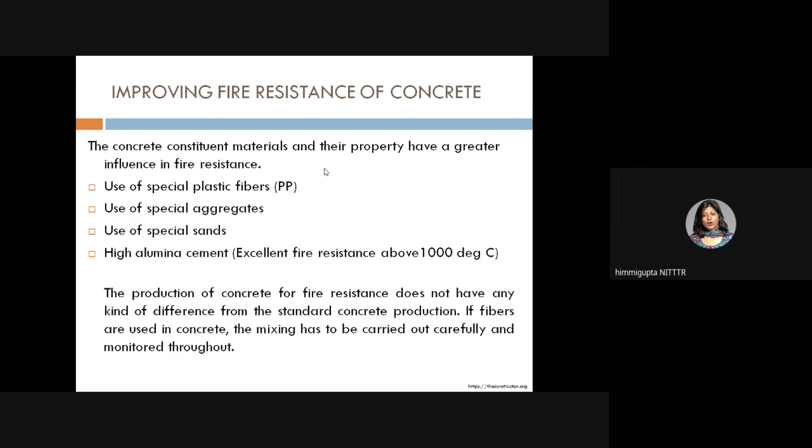If we can use some constituent materials like special plastic fibers, special aggregates, special sands, high alumina cement, these can help make concrete even better. Special aggregates like carbonate, limestone, lime rock, dolomite, aggregates without silica, and lightweight aggregates will help increase the fire resistance. Then fibers like polypropylene monofilament fibers also help.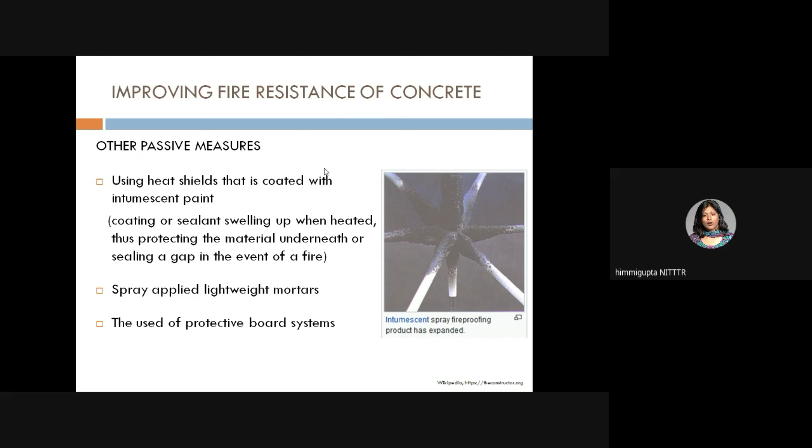For other passive measures, we can use heat shields coated with intumescent paint - a coating or sealant that swells up when heated, thus protecting the material underneath or sealing a gap in the event of a fire. That's an intumescent material.

The key aspects are that we don't want spalling of high strength concrete, temperature movements, and calculation of fire resistant ratings - all these things should be looked at. Then how do you want to anchor reinforcement during a fire, effective design, and fire safety design methods for beams - all these things are very important during design.

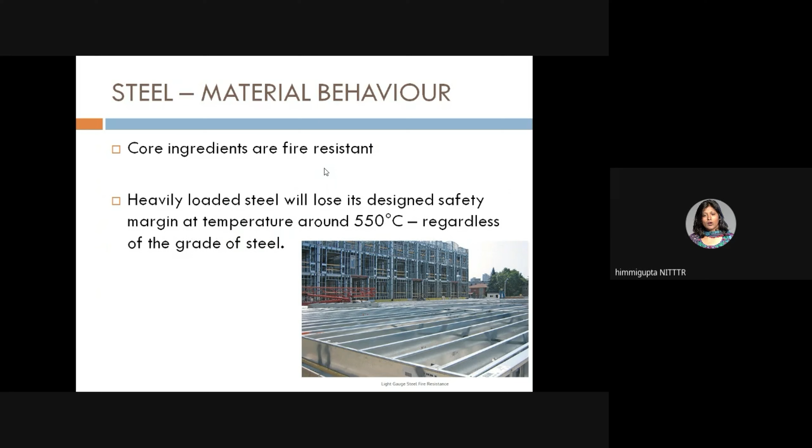When talking of steel, the core ingredients are fire resistant. But heavily loaded steel will lose its design safety margin at temperatures around 550 degrees Celsius, regardless of the grade of steel. So that's a concern - when heavily loaded and the temperature exceeds 550 degrees Celsius, it will lose its margin of safety.

For fire-resistant design in steel, many interventions have been made in terms of design, material behavior understanding, construction, and maintenance. There is a prescriptive approach earlier wherein we have fire protection thickness from tabulated data to achieve the prescribed fire resistance rating, so that much thickness of material has to be given.

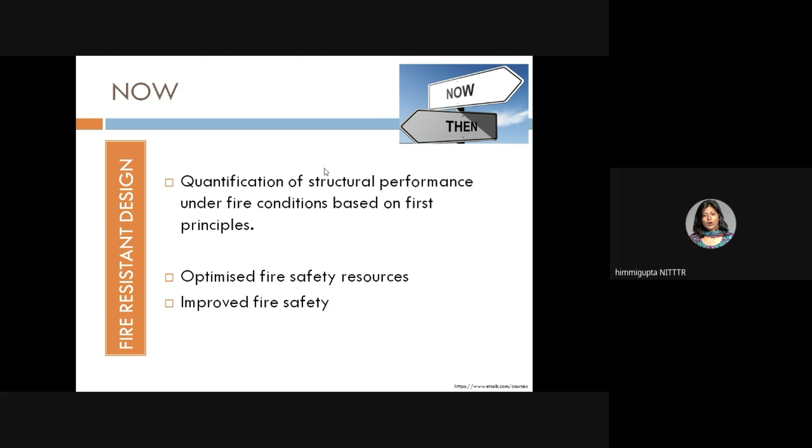Now what is done is we have a quantification of structural performance under fire conditions based on first principles, so we optimize the fire safety resources and improve the fire safety. We are trying to quantify what the structural performance will be. Eurocode is one of the pioneers dealing with this in a very proactive way.

Eurocode gives all the requirements - what should be the structural fire resistance design, construction, material properties at elevated temperatures, design loads and everything. Then tensile membrane action in floor slabs and concrete filled tubular columns is also desired.

Steel framing for fire resistance includes concrete filled tubes and considering whole building behavior. For steel, we can go for internal and external protection also.

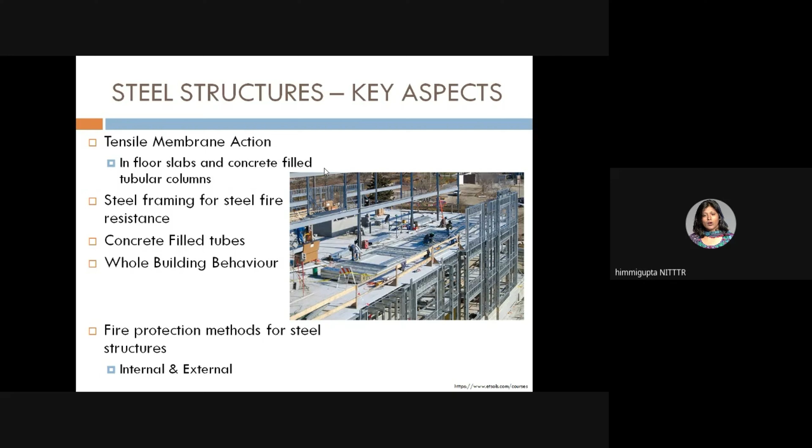Even post-fire assessment becomes very important. How much damage has taken place? How will you obtain temperature and mechanical properties of steel? What will be the method of structural repair? There has to be restriction on the amount of exposed steel, set by the building codes.

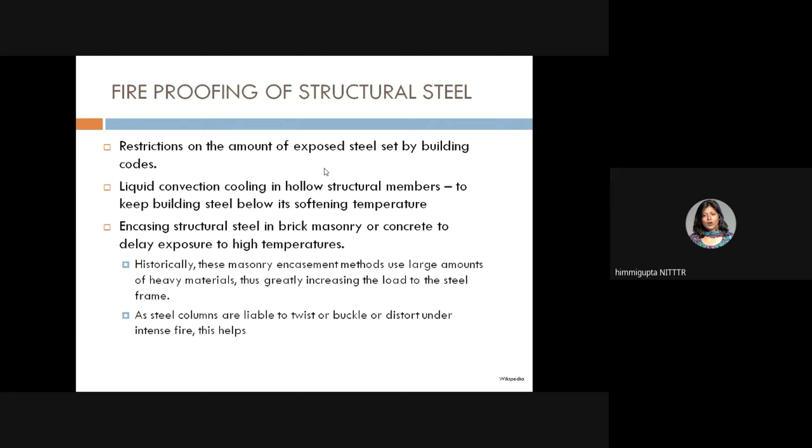Liquid convection cooling in hollow structural members, encasing the structural steel in brick masonry or concrete - this is done a lot, and it also helps in preventing the buckling of slender members.

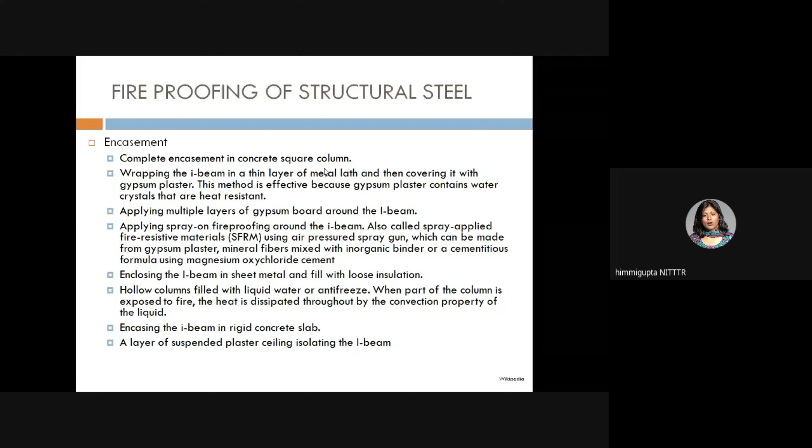The area by volume ratio is very important to control how the fire steel structure heats up - that is a key relation. Surface area to volume is one aspect. There are many types of encasements - you can encase it in concrete, or use various spray applied fire resistant materials.

We have already shown some diagrams. Then for masonry structures, if you're using it for separations, corridors, external walls, the building code will tell how much resistance rating they're required to have. You can do compartmentalization, fire control system, balanced design. Whether fire resistance is required for exposure on one side or two sides is also important. There are brick standards, brick size, void area.

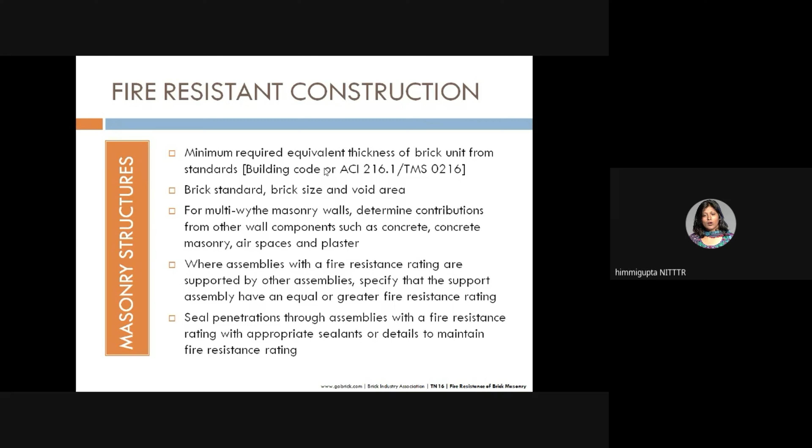ACI has a lot of things on that if you want to refer to it. For timber, as far as construction material, it's a quick, cost-effective alternative. It's a very green material also - of course we have to ethically source it, but we have to fully understand the risk associated with timber when talking of fire aspects.

Once it catches fire, it will create a hazard to nearby property also. Fire resistance ratings are available for timber. There are wood temperatures, mechanical properties, design concepts for heavy timber members, and how it goes for timber connections and fire. Many codes address these kinds of things so that even timber can be used in fire zones.

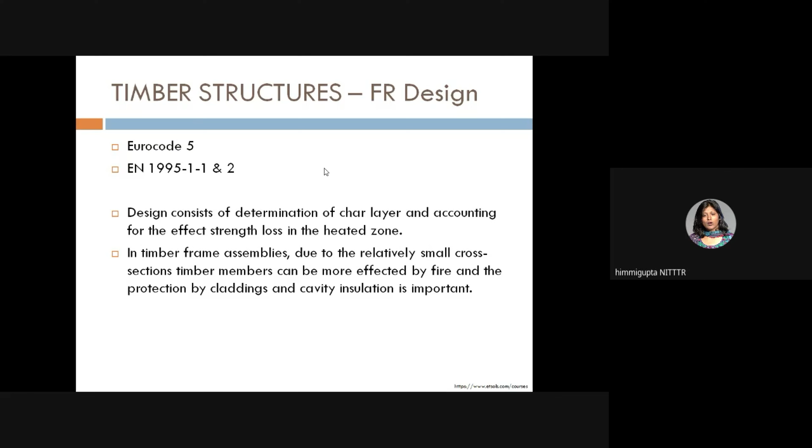Even separating functions - separating walls and floors - can be assessed by tests. These kinds of methods are there. This is a design procedure as shown by one of the Euro codes.

For the design procedure, you go for prescriptive rules or performance based code. In prescriptive, you say this much will be the member section dimensions and everything, how much spray area, thickness and everything. The other is performance based, where we analyze the member and how it will perform in fire.

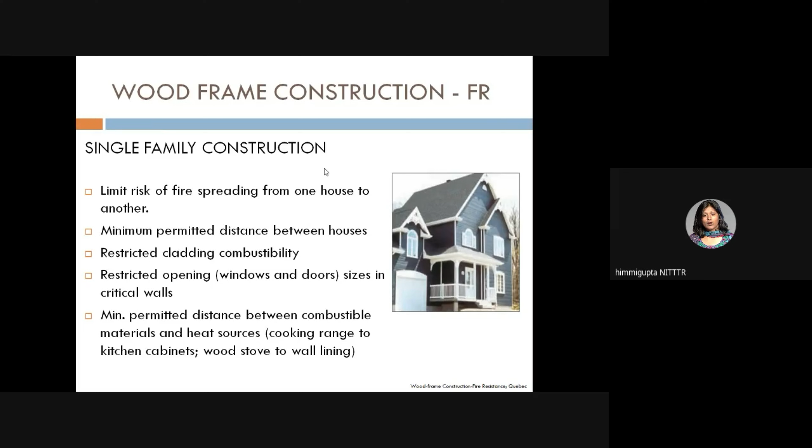For single family constructions, these kinds of buildings are very common where timber is largely used, and there are various norms given for them. Even for multi-family buildings, various norms specify what should be done.

Gypsum board can be used to help prevent fire from spreading. These are all types of things which are available - the details should always be referred to for wood.

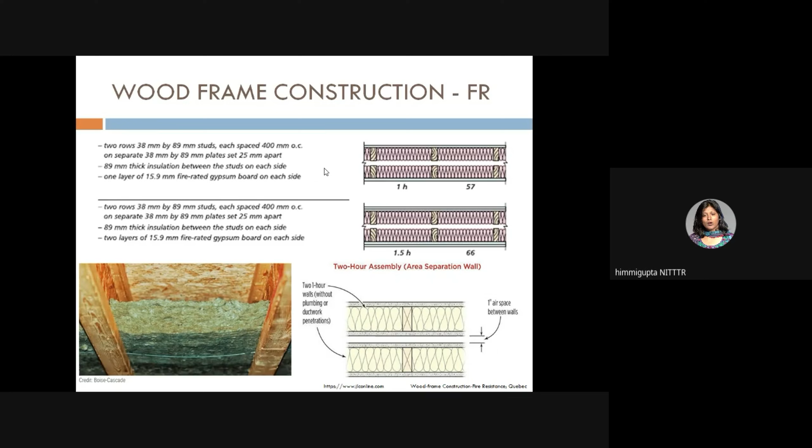Giving air cavity, thermocol, and everything also helps. For floors, they have various things regarding what kind of rating we are using and everything.

Fire cement composites and non-combustible landscaping are also important, because landscaping is where fire will spread very easily.

Even light frame construction is very popular, where we use many small and closely spaced members that can be assembled by nailing. This is very popular in other countries where fire is a big issue many times, because of thick forest covers and everything.

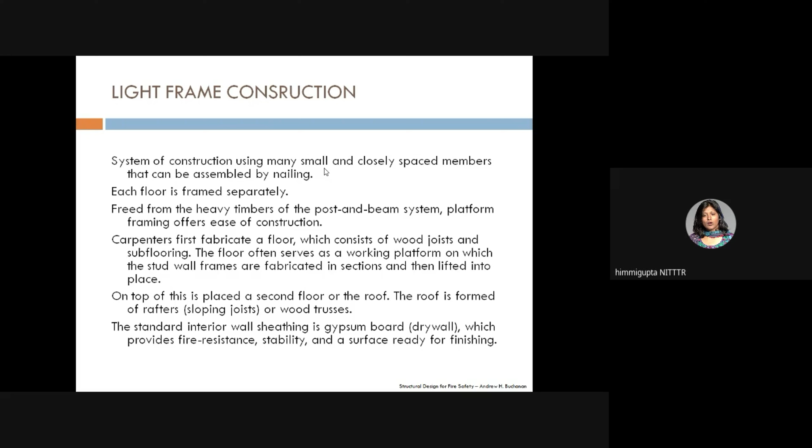First the carpenter fabricates a floor, which is wooden joists and subflooring, and that becomes the working platform on which the frames are then done. These are also traditionally used, and the key aspect is how fire behavior and resistance will happen.

We have to understand the fire will spread fast, so we have to have supporting stairways and enclosures which are fire resistant. All these are very important aspects.

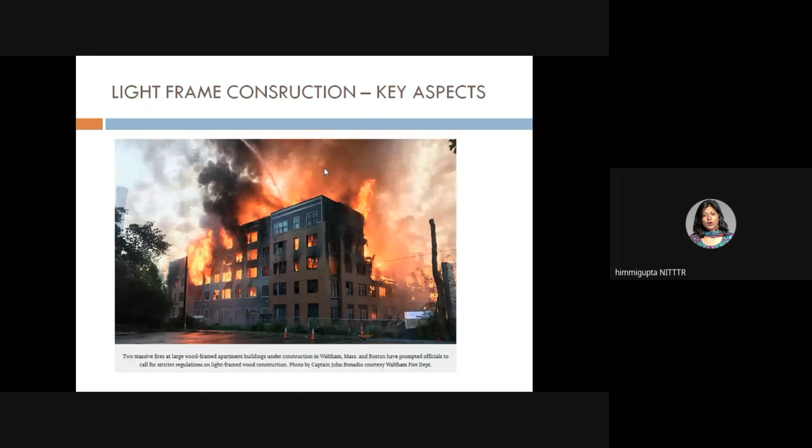If I'm designing for fire, I'm also designing for sustainability, because resilience and durability are very important aspects of sustainability. So I should definitely go for fire resistant design. With this, I'll stop my presentation.